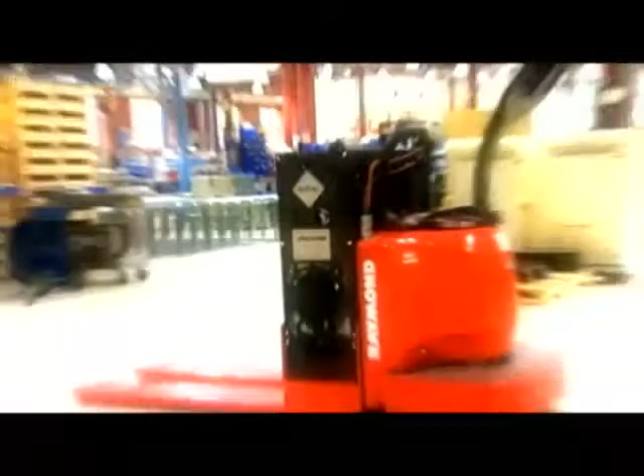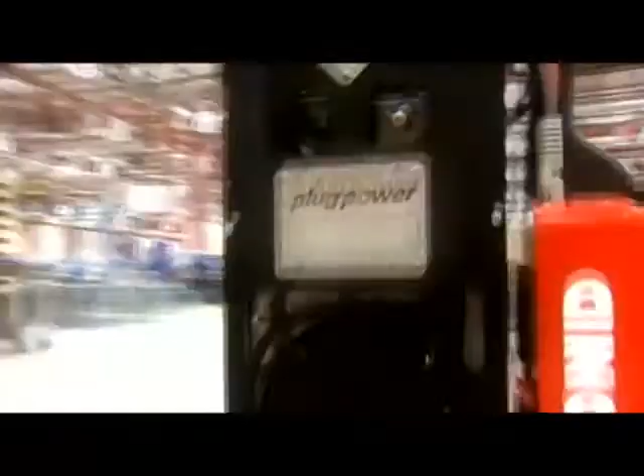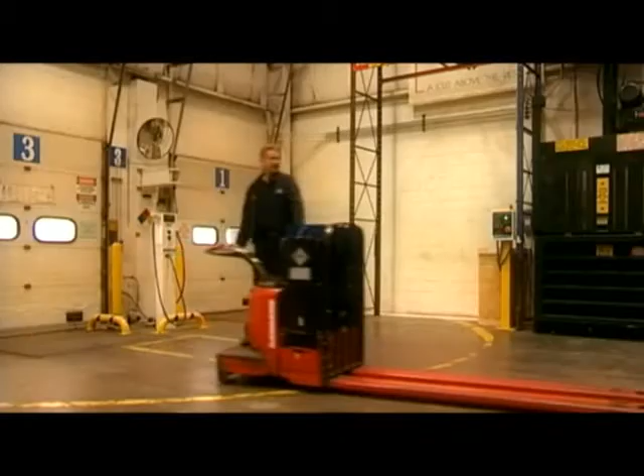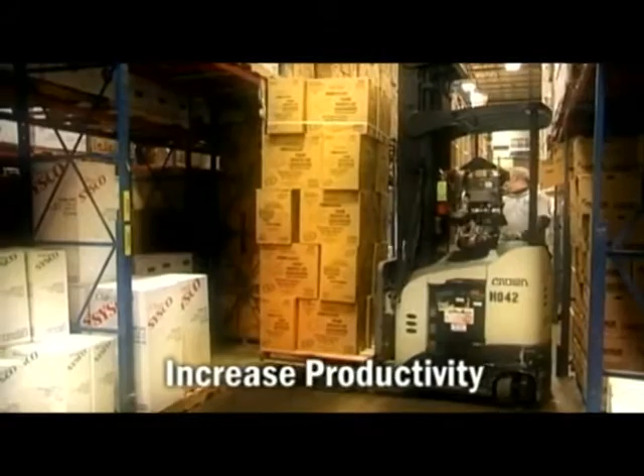Fuel cells are attracting the attention of market-leading companies around the world, and it's no wonder. They make sense, not only from a financial perspective, but as a viable alternative energy solution. And perhaps in no other business is that more evident than in the material handling industry. Plug Power's GenDrive fuel cell power units change the way material handlers think about equipment operational costs, providing a new level of performance and productivity while delivering considerable savings to the bottom line. In an environment where reliability and efficiency are everything, operators prefer the many advantages of GenDrive's continuous power.

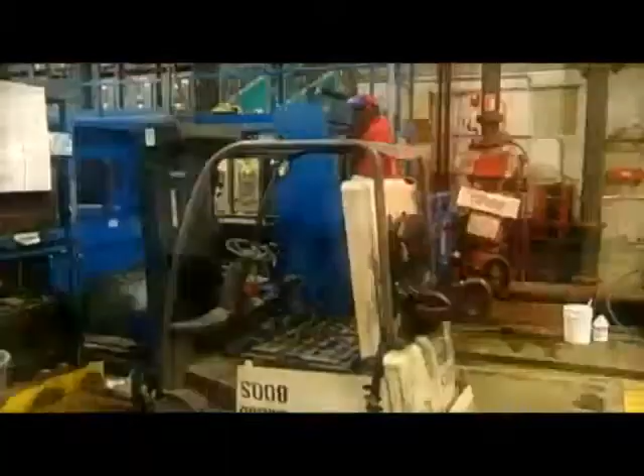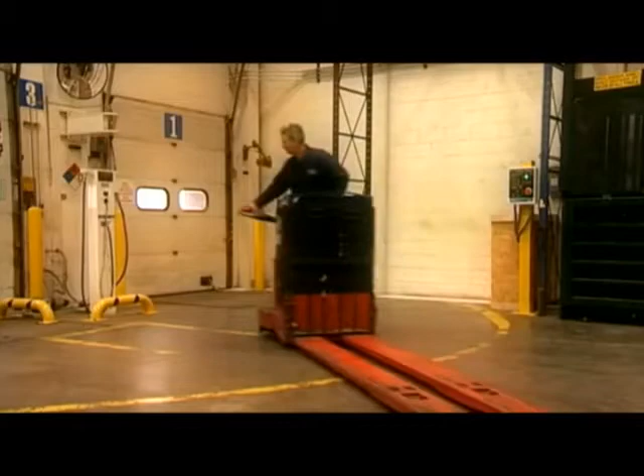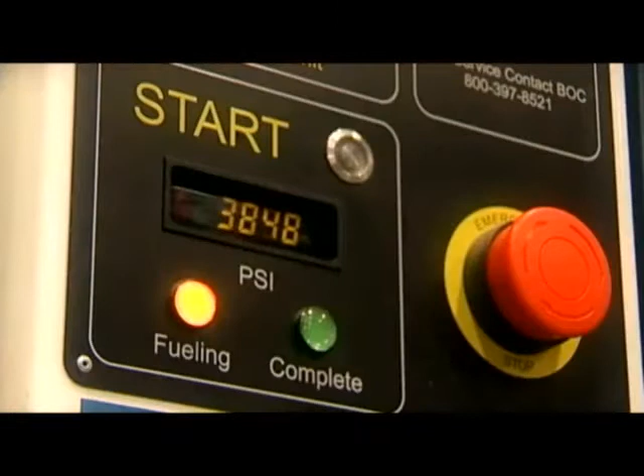Lead-acid batteries in electric lift trucks experience performance droop as they lose their charge, meaning time-consuming trips to the battery room, waiting in line, operator downtime, and lost productivity. GenDrive power units allow material handling equipment to run longer, at full speed, 24/7. Powered by hydrogen, GenDrive does not need to be changed, charged, or cooled. Truck operators refuel the units themselves at sleek, compact hydrogen fueling stations set up at strategic locations on the floor. Refueling can take as little as 1 minute, and it's simple and safe.

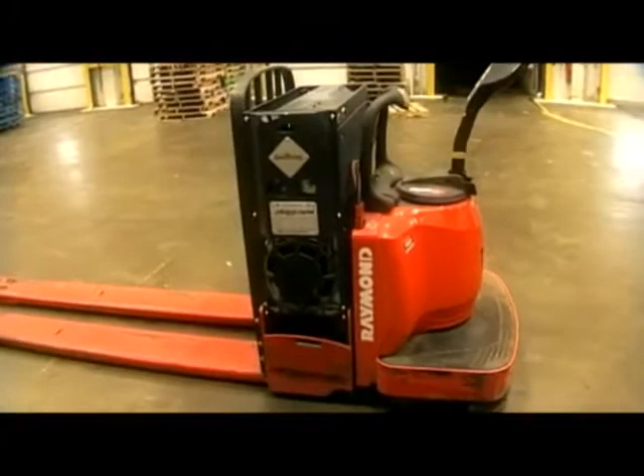With GenDrive, large battery rooms and associated battery changing equipment are eliminated, freeing up valuable space for generating revenue. Operational costs are reduced even further as resources used to store, charge, change, and maintain lead-acid batteries become available for other value-added activities. And by avoiding costly electric motor maintenance, there's less downtime and upkeep. That's because, unlike lead-acid batteries, fuel cells don't suffer from the type of voltage drops that increase electric motor wear and tear. Replacing traditional lead-based batteries with advanced fuel cells from Plug Power is easy.

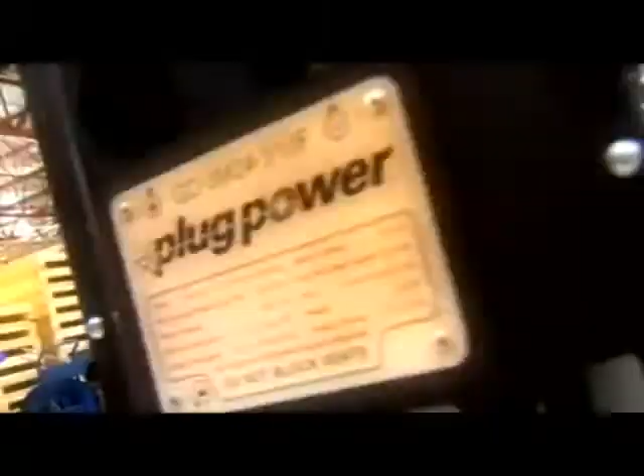GenDrive was developed according to material handling industry standards and fits seamlessly into existing on-the-floor equipment. And GenDrive's technology is safer. Its clean and efficient power eliminates emissions and toxic chemicals from the workplace. And the only byproducts of hydrogen fuel cells are heat and water. Plug Power estimates that a customer replacing lead-acid batteries with GenDrive power units can reduce their electric forklift carbon footprint by 80% each year. For large fleet users, this would be equivalent to taking 20,000 passenger vehicles off the road annually. And the benefits don't stop there. GenDrive doesn't leave behind any lead or sulfuric acid residue like traditional batteries.

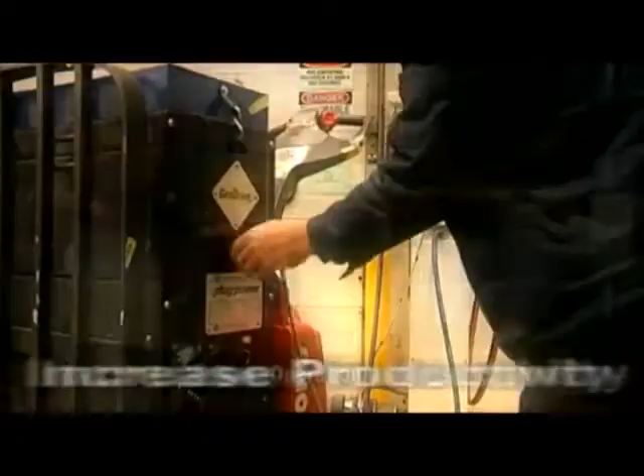If you think going green is going to cost too much, think again. With GenDrive, what's good for the environment is good for business as well. So if you want increased productivity, lower operational costs, no emissions, and reliability proven by over 1 million hours logged at customer sites across North America, Plug Power's GenDrive is just what you're looking for, and more. Find out for yourself. Contact your Plug Power representative today. Power ahead.

Plug Power considers itself one of the leading manufacturers of PEM fuel cell technology, and we'll get into a little bit of what PEM means. There are different types of fuel cells. We've been around since 1997, located in Latham, New York, where we do all of our manufacturing. We did have offices in Canada, Europe, and other parts of the United States, but recently consolidated all the headquarters to New York in the Latham facility. We have about 1,500 units in the field right now with about 5 million hours of runtime, which is pretty significant, and I think the most significant commercial application for fuel cells that has happened to date.

Okay, so I'm just going to take a second to talk about hydrogen. When I give presentations and speak to people about it, there are some common myths, I think, about the hydrogen fuel itself. I've heard it's not safe. I've heard that it was to blame for the Hindenburg disaster. And that it is not readily available.

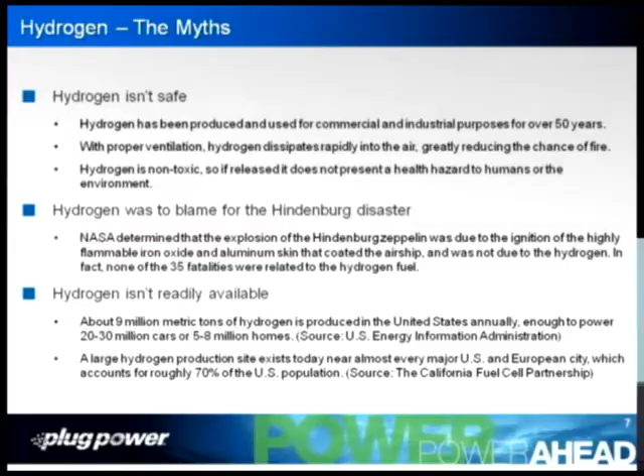It's been used and produced, and it's often a byproduct, in fact, in commercial and industry for over 50 years. And it is very, very light, so it disperses rapidly into the air, which reduces the chances of fire. We'll get into it on the next slide a little bit. It's not that hydrogen isn't flammable, because it is, but it is so light that it dissipates very quickly. So the chances of having a fire where there's any type of injury or damage to personal property or a car is actually quite less than gasoline is for your current vehicles.

And it's non-toxic. For the Hindenburg, NASA did determine that it was not due to the hydrogen in the Zeppelin, but it was actually due to the fabric that was used. It's a very highly flammable fabric, and none of the actual fatalities were attributed at all to the hydrogen fuel on board.

And I believe hydrogen is the most readily available element and natural resource that we could tap into. We just have to get it to work properly and get it out there, a lot of use.

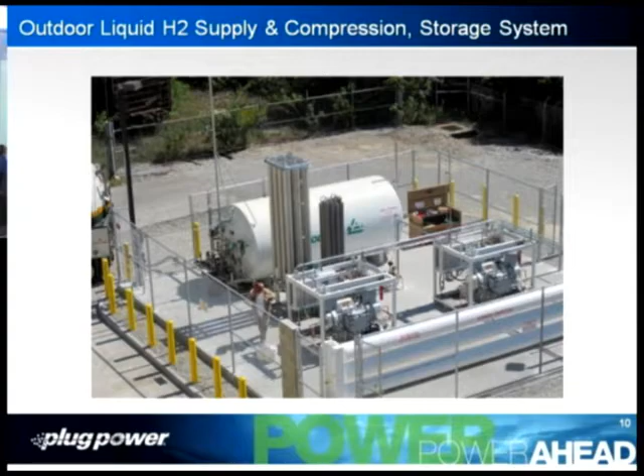And this is what it looks like. If you were to put in, as a customer of this GenDrive technology, the fueling infrastructure, you see right here that big white tank—that is where the liquid is brought on site. It's brought on in a liquid form, and then all of that piping turns that liquid hydrogen into a gas. So when you saw in the video that they hooked up to the GenDrive system, just like you would pull up to fuel your car, it's fueled with a gas, not in a liquid form, but a gas form. The same would be true for the technology that is used right now in the on-road vehicles that they're testing.

We've done some work with Honda and a couple other car companies on that line, but the same hydrogen infrastructure is used for both, which is important later as we talk about the commercialization of this technology and how to get this working properly and quickly. So this is what your indoor dispensing stations can look like depending on which company you're using.

I was at a Department of Energy annual merit review they do when you have programs and you have government funding. Our customers were talking about using the hydrogen, and they had a lot of questions from the audience about the safety of the fueling. They laughed because, as it turns out, it is harder to get the guys just to drive the forklift properly, regardless of what's being used to fuel, than the fuel itself. I think the biggest fuel incident they had on a customer site was when somebody wanted to drive away still hooked up to the fuel source, in which case it just pulled apart and they shut down the station. There wasn't a fire or anything like that, but that was the biggest incident they had trying to get the fueling to work.

Right now, California, for instance, is having a huge push for a hydrogen highway. They recently just started that initiative in New York, with a big push to get vehicles out as quickly as possible. There are vehicles, they've been in DC, that are hydrogen-powered vehicles.

But what we'd like to say is right now we're using more hydrogen than any other application. Our 150-person company is producing the products that are using more hydrogen in the country than any other commercial applications. We have about 6,000 to 10,000 refuelings a week, and about 95% of all the refuelings done right now are with our products.

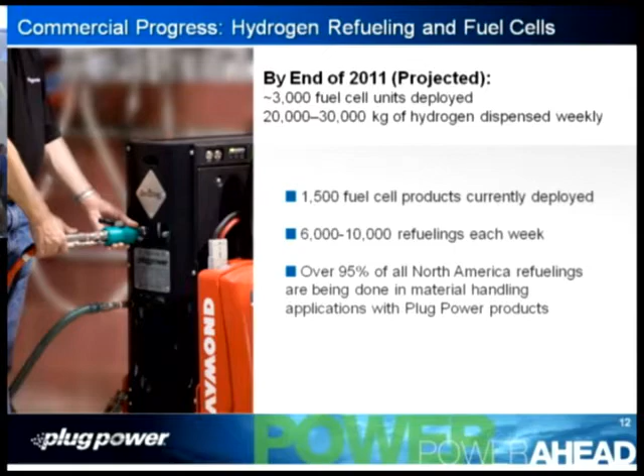So we'd like to see a partnership with the vehicle OEMs that are putting out the fuel cell vehicles and cars, to combine where they're putting the hydrogen stations on a hydrogen highway and marry that up with where you have hydrogen infrastructure already in place at some of these commercial locations.

This is a diagram about how the fuel cell actually works. The little clear plate in the middle, that's actually the membrane. It's a proton exchange membrane. It looks like cellophane if you take a look at it. The two yellow pieces on either side are the metal plates. When you put all of these together, you stack them up, and it's called a fuel cell stack. Depending on how much power you're putting out depends on how many of the plates you've put together.

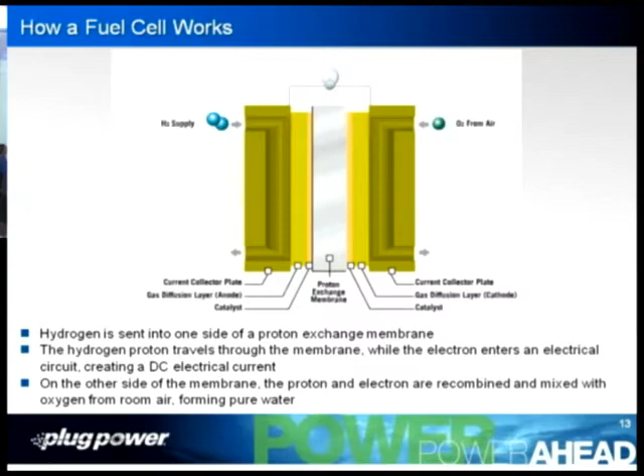You have a feed in of the hydrogen. It breaks it apart, you have the electricity, the electrons going around, and that's what's creating your electricity. On the other side, it hooks back up, and that's where you're getting your heat and your hot water coming out. And these are the explanations.

Okay, so a GenDrive — Plug Power has made a couple different types of fuel cells in its past. Right now we're focused on the commercial application for these fuel cells: forklifts. A GenDrive is designed to replace the battery space and compartment in somebody's already existing forklift fleet.

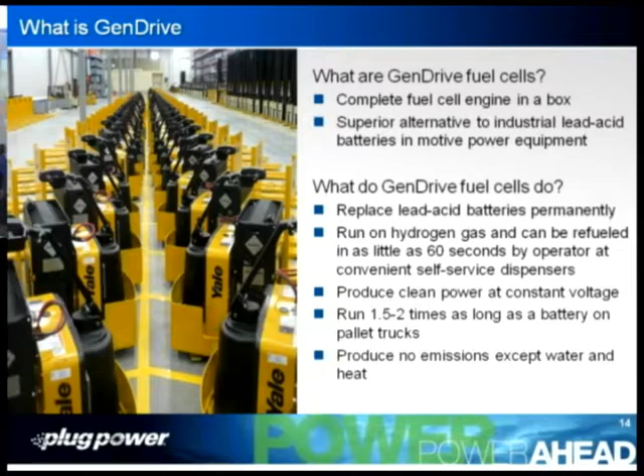So these are more expensive than batteries, and it is difficult to go into a customer site and get them to take a look at your technology and get their mind around putting in a hydrogen infrastructure and getting rid of their battery room. It's a big ask to make of a customer to consider that. So to try to reduce that impact, we've designed our system to fit in the space of what they're already accustomed to using.

So they don't have to purchase new forklifts if they don't want to. There are efforts being made to integrate newer types of forklifts with the fuel cell product into something a little bit more streamlined, but right now these work fine as they are, as just drop-in replacements for what a customer has on site.

And this is a breakdown of what it looks like inside. There are a couple different shapes depending on the types of forklift trucks we're fitting into, but you'll see that the stack component is off to the left. We have some ballast where the hydrogen tank is, where it would store the hydrogen.

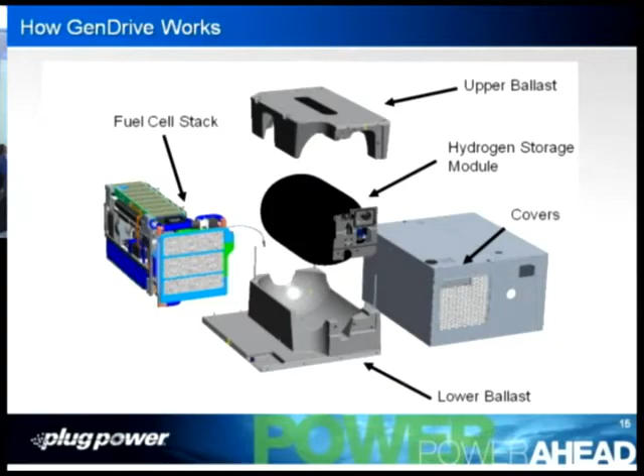Our biggest challenge, honestly, in developing these for different types of forklifts is accommodating for the weight differential for the battery. So when you have a lot of counterbalance trucks picking things up or moving things down, batteries are quite heavy.

They're actually not moved at all by people on site. They have cranes, and it's a very long 20, 25-minute operation, as opposed to just pulling the thing up and fueling at a little hydrogen fueling station.

So the design, when we replace our things where the batteries used to go, is creating that weight to make sure we don't mess up that dynamic so the forklift can do what it's supposed to do.

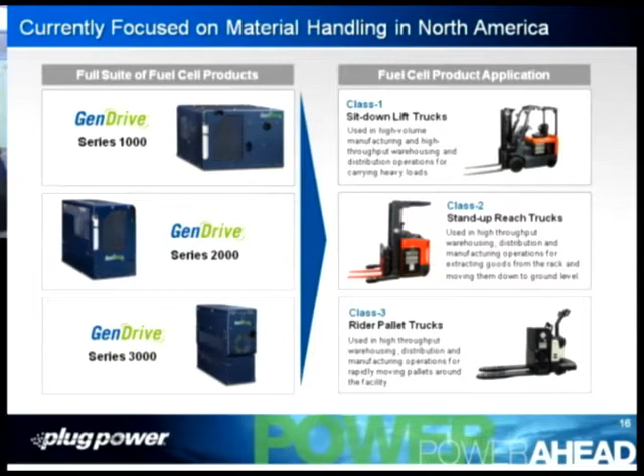We currently make 3 different main branches of fuel cell products designed for the truck that they're opposite of on the page. Within each of those categories, Class 1, Class 2, Class 3, we have lots and lots of different variations depending on the different types of forklift trucks being used. One can be 1 inch less wide or 1 inch taller, so there are lots of variations on the technology.

Now we know that we're more capitally intense. We cost more, just our things cost more than a battery does at the offset. But it takes 2 batteries compared to our 1 fuel cell, in most cases, sometimes 3, to do the same thing for the same amount of time.

And so if somebody has not yet built a facility, they can save themselves already about $1 million if they don't put in their battery change room, which stores all the batteries and charges all the batteries. So if they make that decision ahead of time and choose to go with fuel cell power, the cost of putting in the hydrogen infrastructure, which can often be around $1 million, is offset by the fact that they've not done the battery room.

And so they're starting from a much more neutral place when it comes to the financing for it, and so they'll see their payback and savings much, much faster than somebody who does do a changeover where they already have had batteries in place and working there.

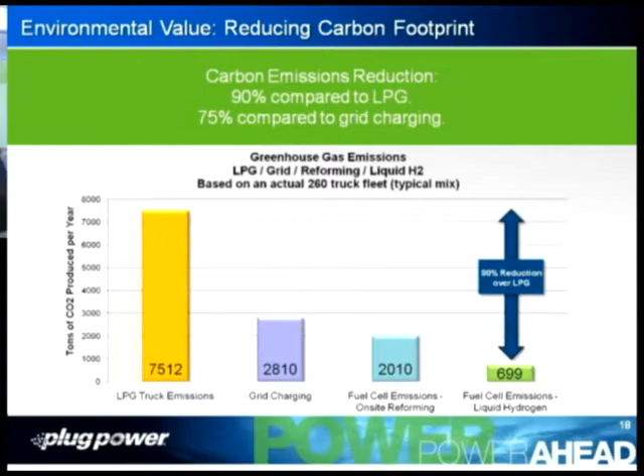So moving from LPG, there are certain LPG trucks that are more difficult to replace. We do have products being developed for that market, but right now it's mostly the 1, 2, and 3, which are battery replacements. You'll see that there is a significant reduction in carbon emissions by moving to fuel cell power.

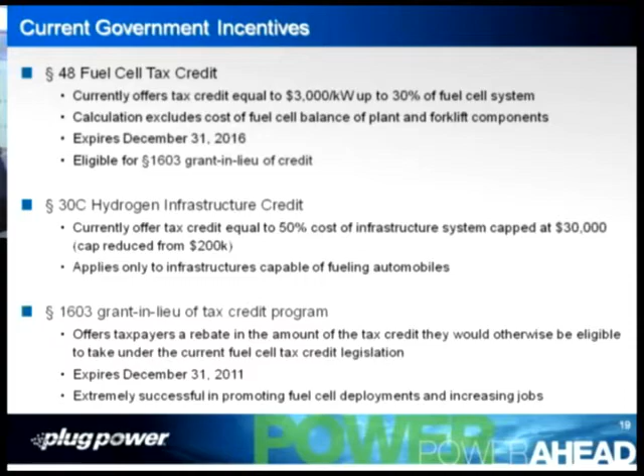I'll tell you right now, as mentioned briefly in the introduction, there are current government incentives and tax credits for our products. There are also other types of things built into there, but we're working right now with both houses of government to get those extended and more properly matched.

So these fuel cell credits came out long before fuel cells were commercial, and now we have customers telling us they're confused about this section of the code, or they're not sure if this applies or not, or if it can be applied to this part of the forklift truck or just the fuel cell. So those are the types of things we've tried to clear up by going back with this new legislation.

And Sysco, you heard them talking up at the beginning of the presentation. They have currently 3 sites, and they're going to be using us for another 5 sites right now. This is something where the Department of Energy funded the very first Sysco site in Houston on a project we worked with them on. And after that, they liked it so much that of these 8 sites, 6 of them have no funding from government sources at all.

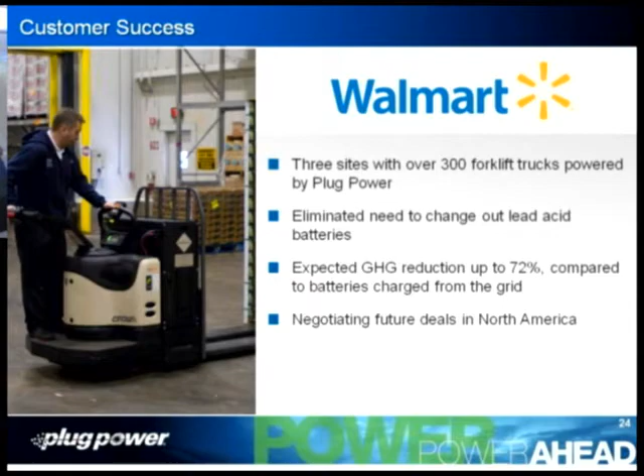Walmart is also a very big fan of ours, and they said at one of their recent ribbon cuttings that they don't do anything unless it saves them money. So economically, that was good to know that that's working for Walmart.

And then BMW - their plant is a little unique. They have a very, very green campus in South Carolina, and I'm going to finish with the video that explains their application a little bit more.

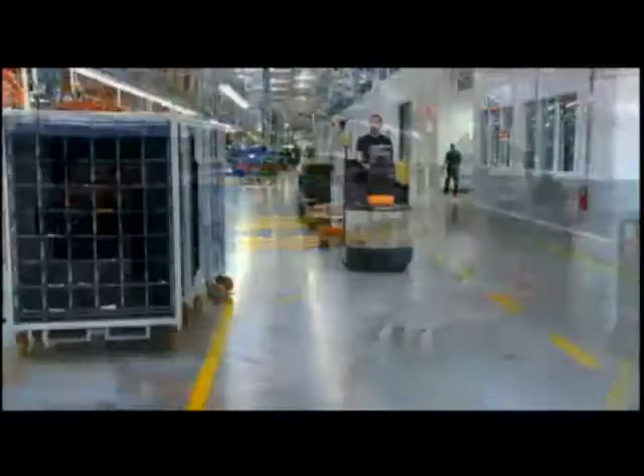Delivering parts to the line at BMW Manufacturing's new assembly hall in upstate South Carolina is now cleaner and greener. BMW will use hydrogen fuel cells to power more than 85 forklifts, pallet trucks, and other material handling equipment, making it one of the largest fuel cell fleets in the United States. Using this green technology is consistent with one of the core principles of the BMW Group: sustainability. One of the important things for us when we started this project was that it be a good example of the sustainability aspect of BMW as a company. This project is a very sustainable project. Hydrogen is the fuel of the future, as they call it. And this project is intended to use only hydrogen for as long as this building is going to be operating, as the means of powering the material handling equipment.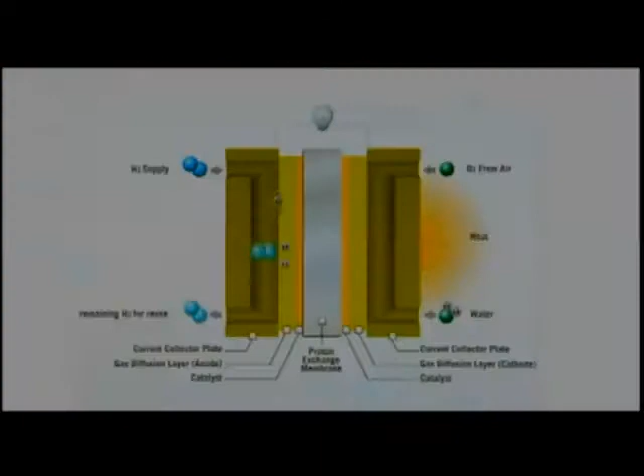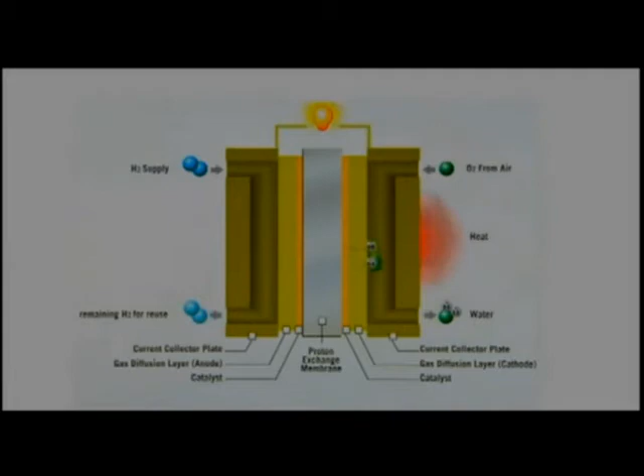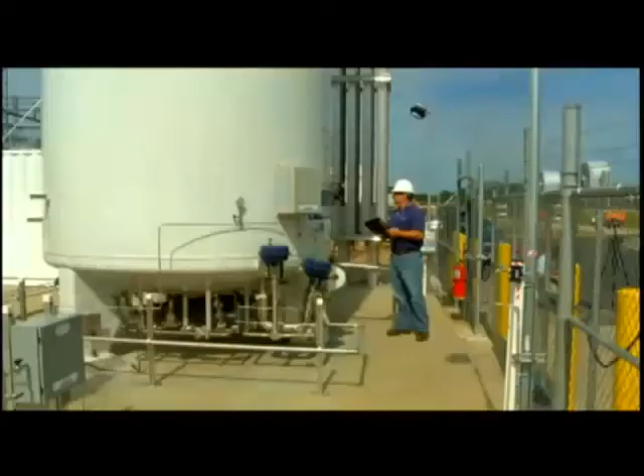Simply put, a fuel cell is an electrochemical energy conversion device. The fuel cell takes stored chemical energy, like hydrogen, and converts it into electrical energy through two internal electrochemical reactions. The only byproducts are heat and water. At BMW, the liquid hydrogen is transported to the plant's energy center, where it is stored in a 15,000-gallon tank at -400 degrees Fahrenheit. The hydrogen is vaporized, which turns the liquid into gas, and then compressed and stored in 4 high-pressure cylinders. From there, the hydrogen gas is sent to BMW's new assembly hall.

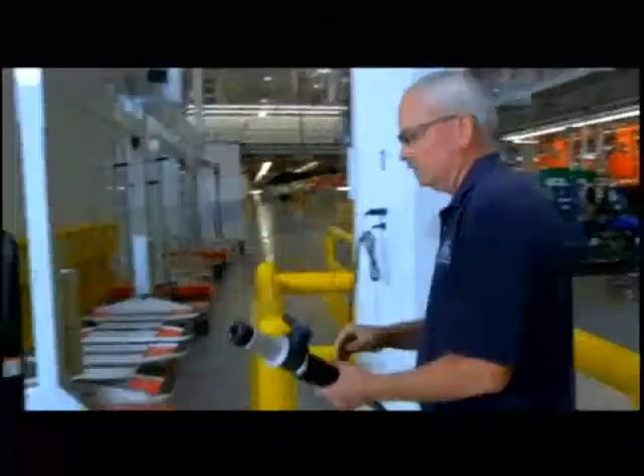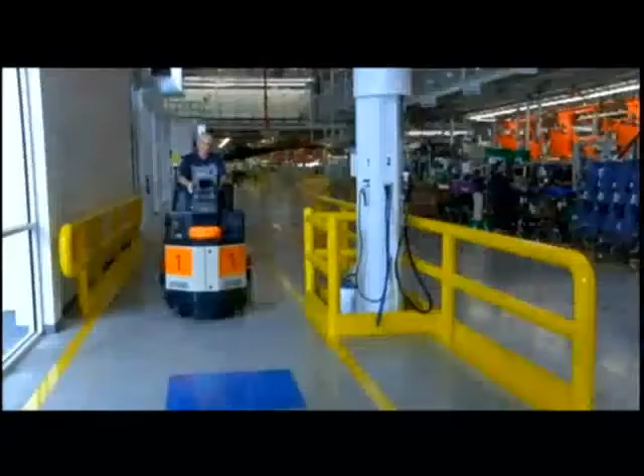Inside the facility are 6 hydrogen fueling stations and more than 85 fuel cell units supplied by project partner Plug Power. One of the main advantages of this project, to add to the sustainability aspect, is that it uses essentially very, very little electricity. A battery requires electricity as the source of power - you have to charge the battery with electricity. The hydrogen is the only source of energy for the fuel cells, and it actually avoids 1.8 million kilowatt hours per year of electricity consumption to charge batteries. And 1.8 million kilowatt hours, essentially, if you don't buy that electricity, you avoid about 1,200 tons per year of CO2 emissions. Using hydrogen instead of lead-acid batteries has several advantages.

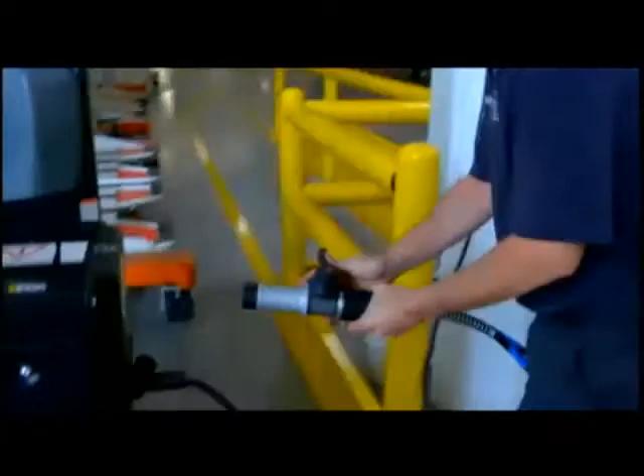Fuel cells provide continuous power at all times with no loss of power until the tank is completely empty. Battery-powered equipment has less power available as the battery nears empty. Fuel cell units can be refueled by a driver in less than 3 minutes at a hydrogen fueling station on site. On average, it takes 20 minutes to change out a depleted battery. Another advantage in my mind is the disposal characteristics of a battery - a lead-acid battery has lead and acid. And the life of the battery is only about 3 years, whereas the life of a fuel cell is at least 6. So they last twice as long, and you don't have those disposal issues that you do with the lead-acid battery.

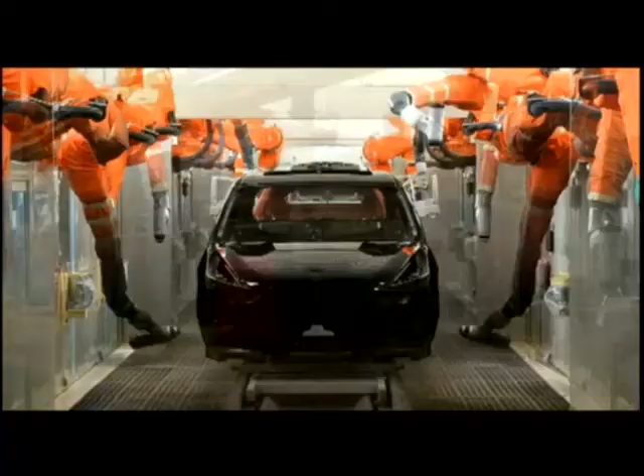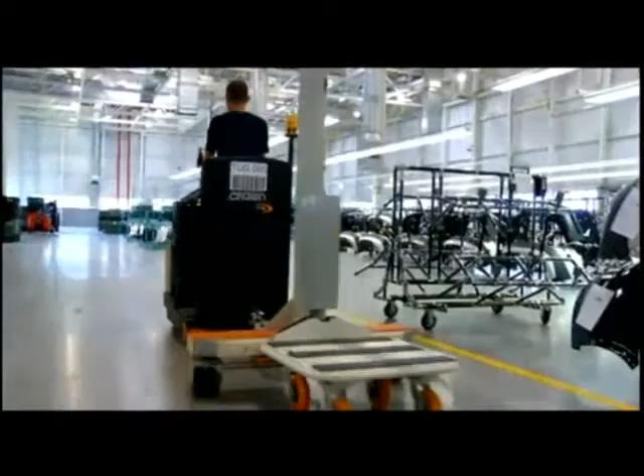The hydrogen fuel cell project is the perfect complement to BMW's successful landfill gas-to-energy program started in 2003. BMW Manufacturing powers about 50% of the plant's total energy needs using methane waste gas from a local landfill. Now, with this green hydrogen fuel cell technology, BMW continues its commitment of being the most sustainable company in the automotive industry.